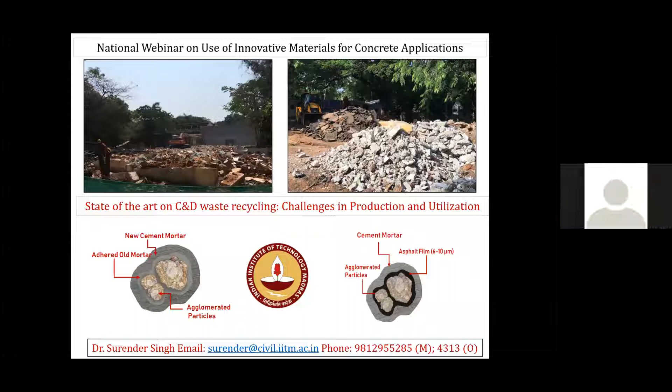So me and my team will be discussing today, or precisely speaking, sharing the experience on various aspects of C&D waste. I'll be taking up the work on the parameters and the challenges that we are facing in production and utilization of C&D waste. So the big picture is that we have to think about what will happen in the next 10 years.

Obviously, as you all must be knowing, India will be the fastest growing construction market in the next 10 years.

By 2030, India will be the third largest construction market, and urbanization will be reaching 40%. Right now it's 30%, and in the next 10 years it will reach 40%. Obviously, it is expected that India will bypass China in becoming the most populated country. So for accommodating all these persons, we need more houses. Around 170 million additional houses are yet to be constructed by 2030, and more than 5 lakh kilometers of multi-lane highways will be constructed in the next 10 years.

So for all these things, additional houses or multi-lane expressways or highways, what will be needed? Obviously, we'll be needing the money to construct the houses and connect the different parts of the country, right? In addition, we'll be needing the resources.

So up to now, what we are doing is demolishing the mountains to acquire coarse aggregates, stopping the rivers to acquire fine aggregates, or we can say river sand or natural sand. And for furniture, we get it from wood. But this is a past scenario. Obviously, we are doing this in the present domain also.

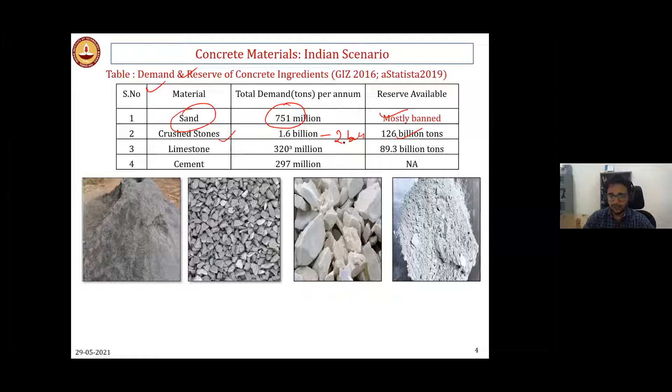Limestone: 320 million is required per annum, and 89.3 billion tons is available.

But we should remember that most of these reserves right now are in reserved areas where we cannot do the mining activities, we cannot demolish it, right? For example, national forest, reserve forest, reserve parks where we cannot do the extraction.

So that means if we keep the current demand and consumption of materials constant, in the next 40 to 80 years we'll be having no resources for our consumption. So that means it is the right time to explore other alternatives for civil engineering applications, right?

So usually there could be three questions in your mind. The first question will be, can we use C&D waste for concrete applications? Everyone now is thinking how to use the C&D waste. If yes...

...what fraction we can use. C&D waste can have different fractions: coarse aggregate, fine aggregates, and powder also. When you crush the C&D waste, some powder will be generated. Can we use the powder? So this is the current demand, right?

And if we are able to use it, how much proportion can we use? And then, is it really a worried situation in India? How much C&D waste is available in India? We should know it, right?

So I hope with today's presentation, we might be able to address all three questions, right?

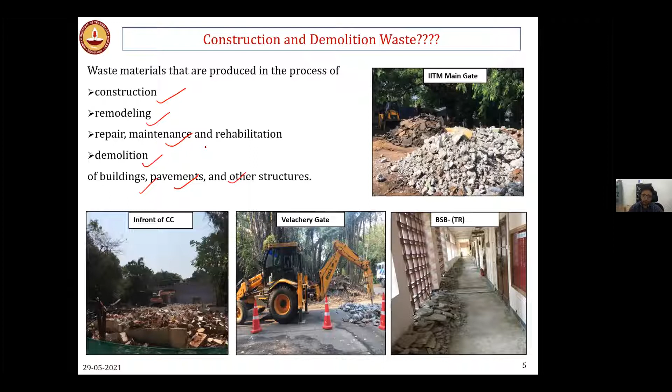So recently, some renovation work is going on inside the IIT Madras campus, and we took photos from there. The main purpose to show these pictures is that you might have seen that near your areas, many activities are being done, and those activities will be generating the C&D waste, right? So normally the normal practice is to dump the C&D waste in nearby areas.

But yeah, what we argue is not to dump it. We can recycle it. So if you take some C&D waste, let's say a building is being demolished, or a pavement is being repaired or demolished, out of all the materials, around 23% of that waste will comprise concrete waste, meaning only the building waste. And then it could have soil component in it, tiles, glass, or other things like brick bats, and it can have asphalt if you are removing the asphalt pavement. So in a broader sense, what we mean to say is that from this study, we found around 20 to 30% of the total C&D waste comprises concrete waste.

Okay, so there is a confusion. Some people call it recycle aggregate, some call it recycle concrete aggregate. The major difference between the two is the material. If we call it recycle aggregate, it will not only have concrete portion, but it will be a mixture - not just concrete, but also bricks, stones, tiles, and mortar of a specific size.

Here in the picture you can see the C&D waste. It needs to be taken out, crushed into different sizes, and that mixture of material is known as recycle aggregate - we can call it processed C&D waste because we did the resizing. If we talk about recycled concrete aggregate, it's the same thing, but here I'll be taking away only the concrete portion and then resizing it into different fractions. In that scenario, we call it RCA, or recycled concrete aggregate.

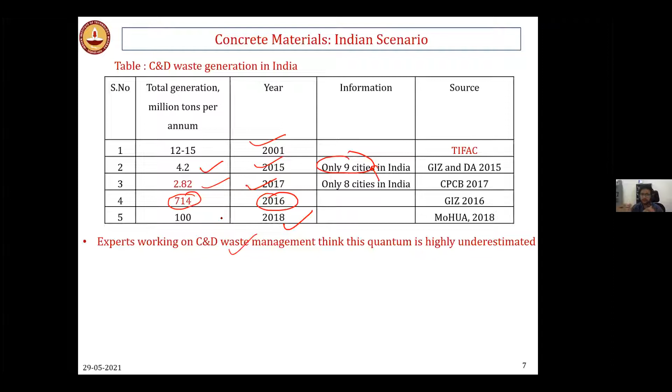If we compare ourselves with foreign lands, considering 530 million tons of C&D waste generation, we stand at the second position after China, with the US third in C&D production per annum. But we know most of the C&D waste is being dumped here and there - if we account for that and consider we're producing more than 1,000 million tons per annum, we could be at number one.

So it's not a good thing, right? But on the other hand, it's a good thing if you're able to utilize it. But we have to see how much of the C&D waste generated in India is actually being utilized. There are many government studies taking place on this.

Earlier it was said we are utilizing or recycling only 2% of the C&D waste, but a recent study has shown we are able to recycle only 1% of the entire C&D waste quantum in India. If I talk about Japan and European countries, where the quantum of C&D waste is lesser compared to India, they are doing 90% recycling.

So what are the reasons we are not able to use the C&D waste? You might have seen many ads and research publications where they are extensively using C&D waste, but why is it not happening in the field? What are the main reasons? We did some surveys and found these main reasons - like somebody says the cost of the C&D waste will be high.

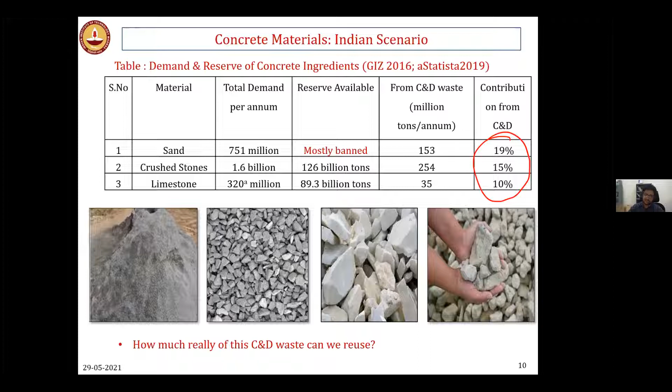Nowadays, if you see most of the plants, they are selling paver blocks or interlocking blocks for footpaths, cycle tracks, sidewalks, and different applications. So mostly in India, we are producing paver blocks made with recycled aggregate, or maybe partition walls - they are using it for that.

But the concern is that the quantum of C&D waste that could be recycled here will be very, very less. We have to think beyond it. We have to see whether we can use the C&D waste for structural applications or not.

But considering the quantum of C&D waste and the crushers available, there is a huge mismatch. So the ministry came with a proposal that whichever city has more than 1 million population, they should have at least one recycling plant.

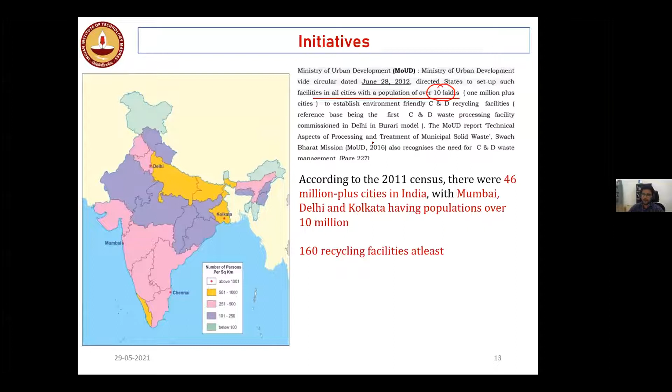So we did the analysis. What we found is that, considering this ordinance, at least 160 recycling facilities should be available in India - minimum 160 recycling facilities, and currently we only have 13 facilities. That means in the near future, many more recycling facilities will be coming, and we could see the use of more C&D waste.

So as far as specifications are concerned, we have recently seen that BIS created the specification and guidelines for aggregates to be used for concrete applications.

The code says we can use recycled concrete aggregate up to 25% if going with plain concrete. If you intend to use recycled aggregate for reinforced concrete, you can use up to 20%. But because it's reinforced concrete, there could be durability or corrosion related issues.

So they restrict it to application up to M25 grade concrete. But if the grade is less than M15, for example ground floor, footpaths, or base course of pavement, we can replace up to 100%, whether coarse aggregate or fine aggregate. So now you can easily use it because the code is already specifying it.

For pavement application, for embankment, we can recycle up to 100%. For subgrade, we can use recycled aggregates up to 100%. For granular subbase, used for the separation membrane or drainage layer, we can use the concrete chunks, that is recycled concrete aggregate, up to 100%.

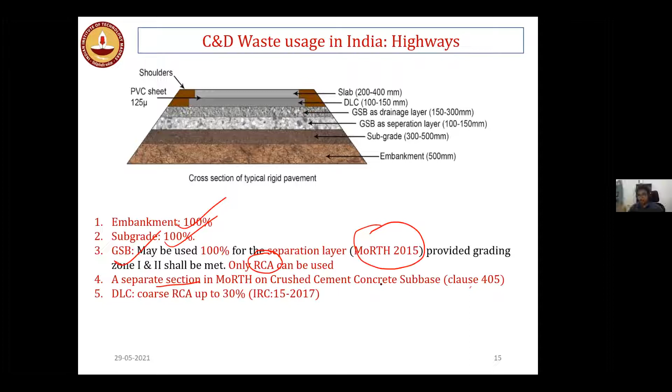For highway application, we follow the MoRTH specification, and the recent one has a separate section, clause 405, on how to use crushed cement concrete for subbase application. For dry lean concrete, used as subbase course or upper base course for pavement application, we can recycle up to 30%.

And sadly, we are not doing so. That is the reason we are only recycling 1% of C&D waste. If I compare with other countries, in most countries for structural applications, the specification allows use of C&D waste in plain concrete up to a proportion of 25% to 30%.

So what is the reason we are not able to recycle? The main reason is the adhered mortar content. You can see the natural aggregate will be like that, but in case of recycled concrete aggregate, it will be having the natural aggregate, definitely, but it will also be having adhered mortar content.

You can see some two aggregates sticking with each other. We call them agglomerated particles. This is the main reason, the adhered mortar content, mortar from the previous building. Because of this mortar content, what is happening?

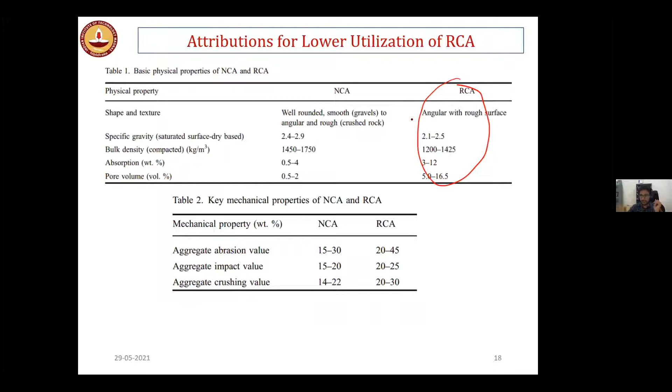The physical properties of the recycled aggregate are way lesser than the properties of the natural aggregate. The quality of the recycled aggregate, if I talk about the coarser fraction, is way lesser than the natural aggregates we normally use for structural activities. And why are the physical properties lesser? Because of the presence of the adhered mortar.

And if you use this recycled aggregate in concrete, there could be a 30% strength reduction. So for structural application, if you want to use M40 grade concrete, and you are using recycled aggregate, it could reduce the strength by around 30%. It's a significant reduction, and you don't want to take the risk.

That's why the code allows you, no need to replace the aggregates fully, but you can go for a proportion of, let's say, 25% or 20%, and it could save a lot of natural aggregates. But why is this happening? Because of the adhered mortar. That means it is time to improve the properties of the recycled concrete aggregate. If you're able to improve the physical properties, we can increase the proportion of aggregates for structural applications.

So there are various means on how to do it. Rohit will be taking part on how to address this adhered mortar. But what I suggest is that at the source only, we can reduce the adhered mortar content.

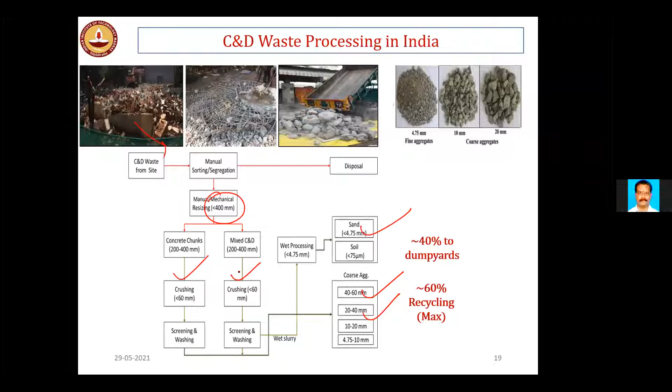So normally in India, what is happening is the C&D waste goes to the plant where they resize it, using a crusher to crush the aggregate into different sizes: coarse aggregate 60mm, coarse aggregate 40mm, sand particles. Some plants use dry crushing, some use wet crushing in order to reduce the powder content, since some powder emits during the crushing operation. Normally only one crusher is used at the site, the jaw crusher, and we have seen some plants use the cone crusher.

As a primary crusher, only one crusher they'll be using. But what we suggest is why don't we use different crushers? Maybe we can use the jaw crusher as the primary crusher, and we can use the cone crusher as the secondary crusher.

I have talked to many crusher plants. They are saying we are using two stages of recycling, and in both stages we are using jaw crusher. But can we go for tertiary crushing? That means three crushers: jaw crusher followed by cone crusher, followed by impact crusher.

Because our studies on natural aggregates show that if you go for two-stage or three-stage crushing, the physical properties of the aggregate will be better. It will have higher cubical shape and better interlocking capacity. That means it is time we should come forward and optimize this crushing cycle.

So if any one of you want to do your research work, obviously you can do it.

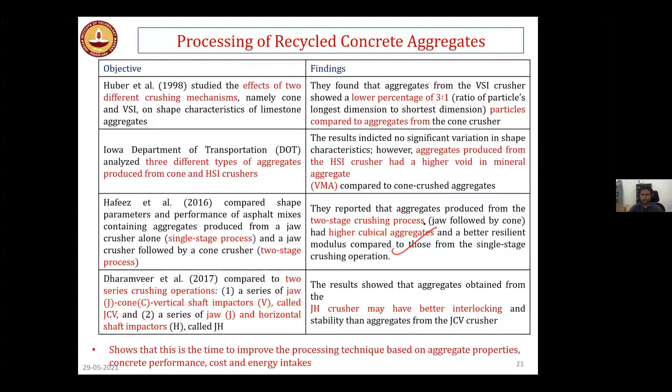There could be many methods available in the literature, and we are also following many methods. But mostly we have found that if we are able to remove this mortar, then definitely we can get the natural aggregates out of the C&D waste. So Rohit will be throwing light on the various mechanisms through which the aggregates can be extracted from the C&D waste.

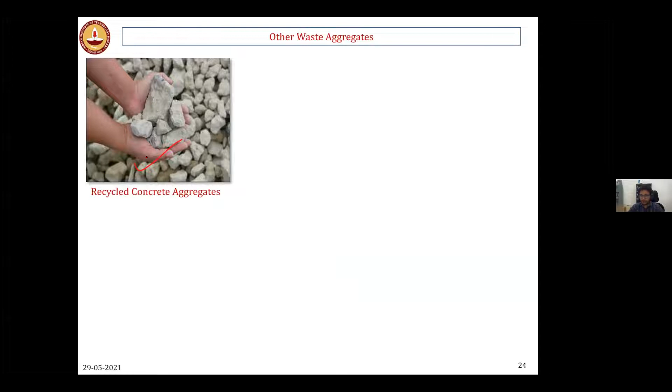So can we explore other alternatives for aggregates for concrete production? Definitely we have the reclaimed asphalt pavement - that waste we get from demolition of flexible or bituminous pavement. And then can we use industrial aggregates such as iron slag? Definitely we can use it. In fact, IS 383 allows use of industrial waste like copper slag or steel slag.

And nowadays fly ash aggregates as lightweight aggregates are also being used. Now research is going on whether we can use plastic aggregates or rubberized aggregate to enhance the toughness properties of concrete. So there could be different alternatives, but as an engineer we should know the chemistry and physics behind these aggregates. We know the chemistry behind concrete aggregates and RAP aggregates, but before making any decisions, we should explore the potential of different aggregates.

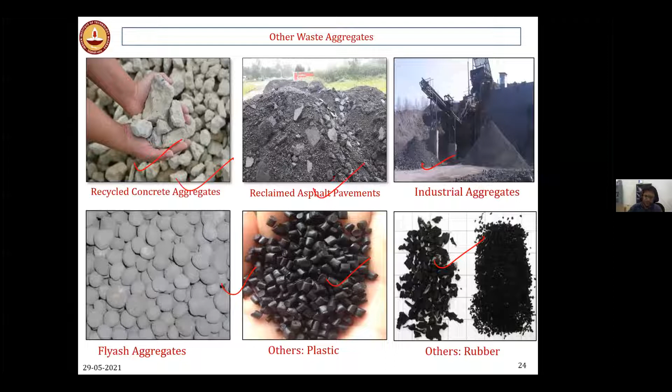So I'll be skipping these slides. Recently what happened - we came up with a center of excellence. It is the first ever center of excellence dedicated for recycling. IIT Madras - the ministry has sponsored IIT Madras to start this center. Actually, we are calling it a prospective center of excellence.

So what we'll be doing here - whatever the waste, whether it's concrete waste, recycled aggregate, RAP waste, or industrial waste, we'll be studying them and we'll be providing the solution.

So the solution will not be based upon the material level alone; we will also be doing research on how to reduce the generation of waste during construction and how to manage all these activities. If you want to get more knowledge on the first ever Center of Excellence, you can visit the site. You can see 11 different faculties who are working with waste and how to manage it have clubbed together and started this Center of Excellence.

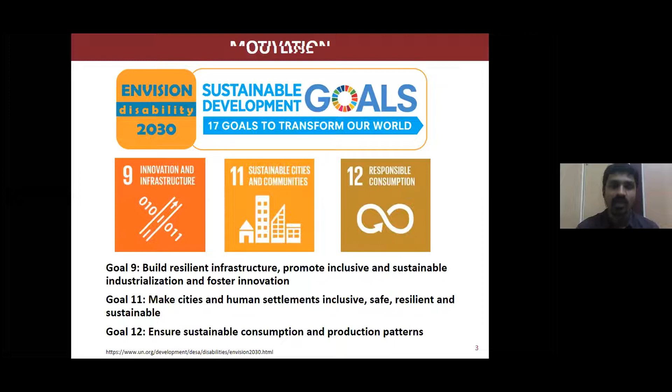About motivation: as you might know, the United Nations have come up with 17 Sustainable Development Goals. This talk will address 3 of those 17 SDGs: SDG 9, building resilient infrastructure and fostering innovation; SDG 11, building sustainable cities and communities; and SDG 12, responsible consumption and production patterns.

Coming on to the Chennai case study: what is happening with demolition waste in Chennai? If we understand that, then we'll know the need for talking about various strategies and policies. I'm categorizing the waste handling practices into 3 different phases: pre-demolition, demolition, and post-demolition phase.

In the pre-demolition phase, if you are the owner of a building and want to demolish it, you go to the corporation or local body and apply for a permit with all required supporting documents. To authenticate those documents and information, the local body sends an AE to inspect the site, and once the information is validated, your permit is sanctioned, and you can go ahead and demolish your building.

However, while it is good practice to have this system which extensively validates all the information, what we're missing here is we are not focusing on the kind of waste that will be generated or how the waste will be managed in the process. The only thing validated is preliminary details like whether the applicant is the real owner or not, with no focus on waste management.

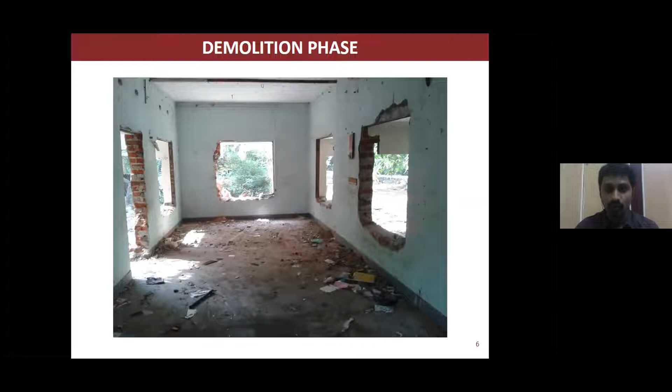In the demolition phase, as you can see in the slide, all the wirings, doors, windows, and every other material that has economic value is salvaged, and only the structure remains. Almost 90 to 92% of demolitions happen this way.

So what happens to salvaged materials? They are carefully chipped, salvaged, and stored, and they re-enter our supply chain as they have a very strong informal network. We should take care that if we are designing any strategies and policies, we should not disturb this informal and very strong network.

Then we actually use hydraulic breakers or pneumatic hammers to take down the building, and even the reinforcement steel embedded in the concrete chunks is salvaged using gas cutters and sold. A major chunk of all the steel we use is predominantly recycled steel, which goes to the yard, gets melted, and comes back in some chain.

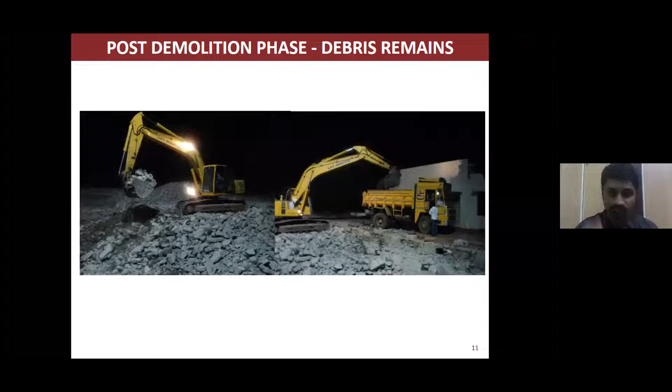So in the post-demolition phase, only debris remains, a mixture of concrete, brick masonry, tiles, and other ceramic products. What happens is they are usually shipped off at night from the site and disposed of in all places - lakes, road banks, sidewalks, and everywhere else you can see. And of course, the land mafia also has control over it. It's not a new phenomenon; it has been happening for a long time, and you would have noticed it on every road and sidewalk.

Why does this happen? As Dr. Surender mentioned, our recycling capacity is very low. For example, the total installed recycling capacity in India is only about 2.5% of the total waste generation. On top of that, we don't even know how much waste we're generating, because of huge variation and underestimation in waste generation data. To understand the magnitude of this deficit: Netherlands, with a population of 1.7 crores, has 120 recycling plants, while India, with over a billion population, has only about 10 to 20 recycling plants. That's the scale of the deficit we're talking about.

So what's problematic? We have unreliable estimates compared to the extensive surveillance happening in other countries. We do not focus on waste, whereas other countries have mandatory preparation of waste management plans, crucial infrastructure, and networks of facilities. We do heavy demolition, while many other countries do selective demolition where they properly dismantle the structure. We have a mixed waste stream in terms of debris, while other countries do on-site sorting. And we have very inappropriate policies and structures compared to effective policies and adequate enforcement elsewhere.

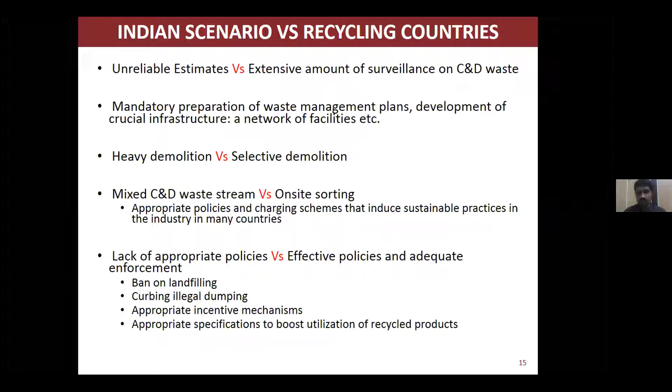So to counter this, in order to nurture a recycling ecosystem, what we need is effective policies. Based on content analysis of over 300 journals and secondary reports, we have decoded strategies and classified them into 10 different policy buckets: taxes, incentives, voluntary agreements, disposal regulations, research and development, mono landfill, demonstration projects, training schemes, waste exchange platforms, and waste management plans. We shall look at each one of them in more detail.

Disposal regulations, as the name indicates, are disposal restrictions, and these are very common. For example, in the Netherlands, there is a complete ban on disposing debris that can be reused or recycled. In Hong Kong, there is permission based on sorted nature - for example, if you have a mixed waste stream with more than 50% inert waste, that is concrete, debris, and bricks, you are not allowed to enter the landfill; you cannot dispose of it there.

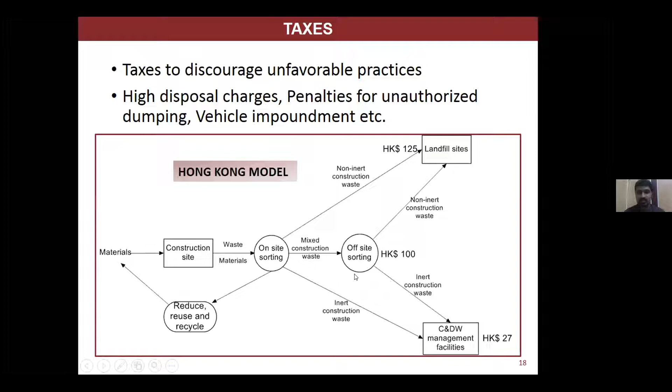The Hong Kong model is very effective. For example, from the construction site, if you take material to a landfill site, you are charged 125 Hong Kong dollars per ton, and there is a restriction that you cannot bring in inert construction waste there. So what will happen is you will have to do on-site sorting, and once you do that, the inert waste is accepted at a separate waste management facility where you are only charged $27. If you cannot do on-site sorting, you can take it for off-site sorting and pay $100 to get it sorted, then take the non-inert fraction to landfills and inert fractions to waste management facilities. These systems need to be put in place to facilitate recycling.

The third important thing is... sorry, there's a disturbance. Your voice is not enough. I think I have some comments. They can't hear you properly. I'll probably raise my voice.

So the third important structure is incentives. It's a carrot mechanism to provide benefits for environmentally friendly practices. For example, in Hong Kong, adoption of recycled materials leads to exemptions in FSI calculations, so you get an incentive to use recycled products. In the USA, there's a recycling grant that helps you set up recycling facilities. And in King County, it's not just money, but there's also a recognition program where they give construction workers an award for each site that does waste management properly. So there are various kinds of incentives that you can plan.

One of the other things we've noticed is that this is not just on the regional level but on a site level as well. Incentives have to be put in place there too. For example, there is a study that says incentives must be shared with all stakeholders at all levels. The labor doing on-site sorting at the lowest level should also gain some benefits from the waste management activity. Therefore, there must be incentive sharing across levels in the waste management system, and people in charge of developing such systems should think about incentive sharing as one of the key measures for better recycling or waste management activities.

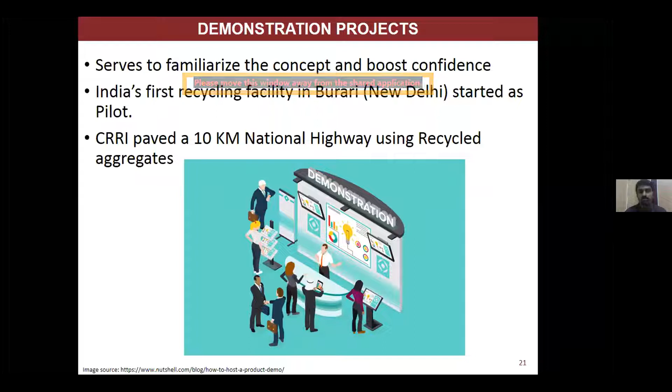The next one is demonstration projects. These are very common and serve to familiarize the concept and boost confidence. For example, India's first recycling facility in Burari was set up as a pilot plant in 2009, and it has since been upgraded in capacity and is running very well. Even the Central Road Research Institute has paved a 10-kilometer national highway using recycled aggregates to build confidence among stakeholders in using recycled aggregates safely. Such demonstration projects are needed in India as well, and more such projects should be done.

Of course, the next one is training schemes. Training imparts necessary skill and knowledge to perform construction waste management. It's been noted that almost 33% of on-site waste could be avoided through careful design decisions. However, lack of awareness also plays a role. For example, in a TIFAC survey, they noticed that almost 30% are unaware of recycling possibilities of construction waste streams, and almost 70% are unaware of recycling techniques at all. So that's the kind of inadequate knowledge we have about waste management, sorting, and various other activities.

So training schemes need to be put in place. Then, of course, research and development is a no-brainer to push the boundaries of the system. Only R&D enables development of recycling technologies, identification of waste, and performance evaluation. The previous speaker also talked about development of standards and regulation, so for R&D I need not mention much—that's one of the major indicators to nurture the system.

Voluntary agreements—it's pretty new. Voluntary agreements can drive responsible behaviors by bringing various stakeholders together. This is effective in situations where very complex management issues might pop up.

For example, in selective demolition, on-site sorting, utilizing recycled products, handling packaging waste. Let's say if somebody puts up a recycling plant, he won't know how much demand or how many people will actually buy recycling products. So once enough people come together and sign an agreement or pact saying 'I will procure this much quantity over this specific period of time,' the recycler will have good confidence in terms of visibility in demand, and thereby better planning can be done.

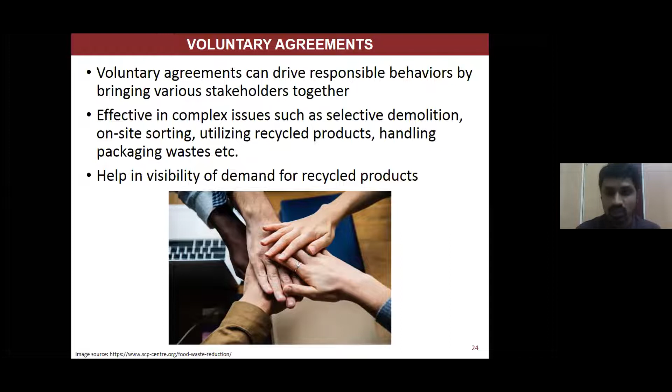The next is waste exchange platforms. Of course, it's born out of the internet. It helps solve the information mismanagement problem by matching supply and demand. As we all know, land space is a scarce resource in construction projects. Therefore, construction personnel would want to get rid of waste as early as possible after it's generated. These platforms give visibility and therefore enhance the chances of beneficial use of such waste.

Of course, the CPCB also has a waste exchange portal that deals with hazardous and non-hazardous waste, and various other waste exchange portals are coming up—it's been recently new here. However, it's very old in various other countries.

Lastly, we're talking about waste management plans. Of course, any activity has to be planned properly before we start it. So we need to have a proper target, we need to put appropriate processes in place, and of course it's a must that responsibility be clear-cut and mentioned clearly. And there must be incentive sharing even in the waste management plan, and thus it can actually succeed.

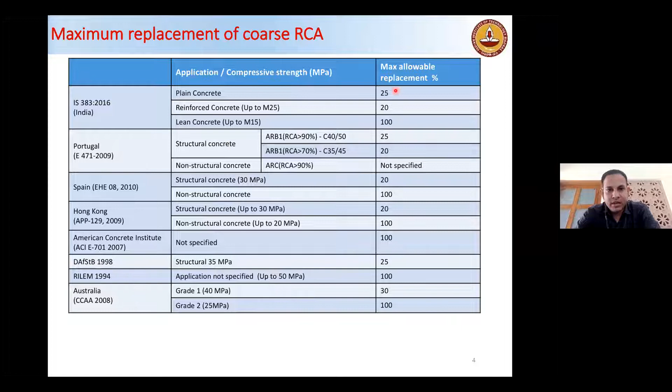You have already seen this. There are many standards, but 100% replacement is allowed only for lean concrete, and 20 to 25% is allowed only in plain and reinforced concrete applications, limited to sub-base, paver blocks, or non-structural applications. You have also seen these failure modes. Out of these, there are two common failure modes: failure of the adhered mortar, and failure at the ITZ between the old adhered mortar and the original aggregate.

To overcome these two cases, there are beneficiation techniques: removal of attached mortar, where we try to remove the attached mortar from the surface of the aggregate, and surface modification. I'll be talking about these two beneficiation techniques, and also a comparison between these different techniques.

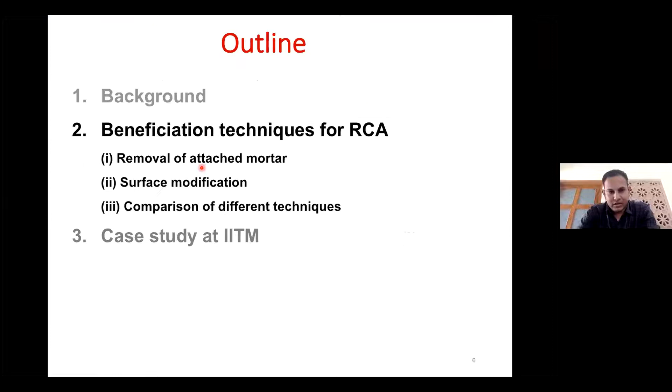Mainly you can divide these processing or treatment techniques into two parts: removal of attached mortar, and surface modification. Removal of attached mortar could be done by mechanical scrubbing, acid soaking, combined action of thermal and mechanical action, microwave heating, and other methods like ultrasonic cleaning. Surface modification could be done by coating with pozzolanic materials and impregnation of nanosilica or nanolime. There are other methods like polymeric treatment, where you coat the aggregate surface with PVA and other chemicals to increase the bond or reduce water absorption. There are also biodeposition of calcium carbonate and curing or carbonation conditioning.

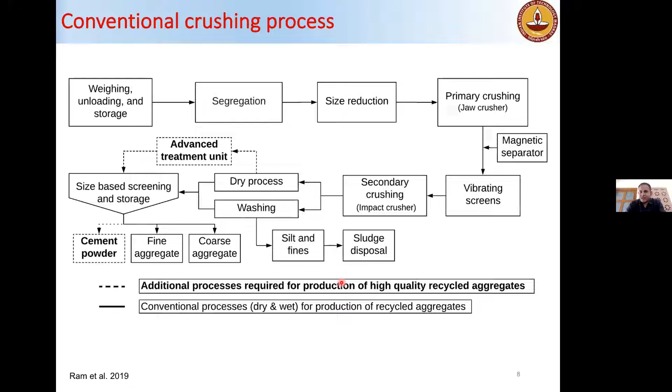Before we go through these processing or treatment techniques, let us go through the conventional crushing process. As Professor Surender and Ram mentioned, there is weighing, segregation, size reduction, and crushers used, maybe jaw crusher and impact crusher, and meanwhile you separate the rebars. There are two methods currently practiced in India: one is the wet washing method, where you remove the silt and fines, and one is the dry process. After this, there is size-based screening. Advanced treatment could be done after this process, or maybe after the primary crushing also.

Let us see what treatment techniques are available. First is mechanical rubbing, where you can use an eccentric shaft rotor, and the RCA passes between the outer and inner cylinder, rotates, and removes the attached mortar. Another one is similar to ball milling, where the mortar is removed by scrubbing against iron balls in separate parts of the drum. At laboratory scale, people have been doing this in small milling machines or abrasion machines as well.

Next is acid soaking. In this, RCA is soaked in acid for 24 hours, and then water is added to remove the acidic solvent or the corroded part of the aggregate. Granite or the other aggregate are more stable, whereas the mortar is prone to acid corrosion. So it is dissolved and removed, and then soaked in water, and what you get is the beneficiated recycled aggregate.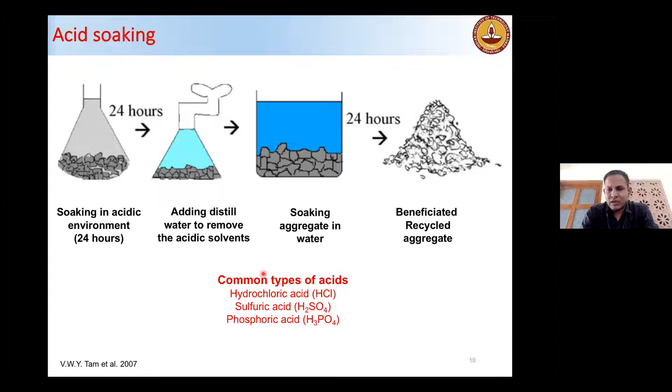Next is microwave heating, where heating is provided through microwaves, and this basically acts on the ITZs. You have a different dielectric constant of the mortar and the aggregate, so differential thermal stresses are developed at the interface of mortar and aggregates, and then it is delaminated, and you get clean aggregates.

There is a pilot scale plant in Singapore where they have used 10 kilowatt for 1 minute, and then after the microwave treatment, they suddenly put the aggregates into water for thermal shock, and then it is recycled. The other one is the combined action of thermal and mechanical process.

First the crushed aggregates are heated. The temperature could be from 300 to 500 degrees C, combined with a mechanical process. The heat will dehydrate the cement products, and additionally there is differential thermal expansion at the interface of aggregate and mortar. Further, a milling process is used to remove the loose attached mortar.

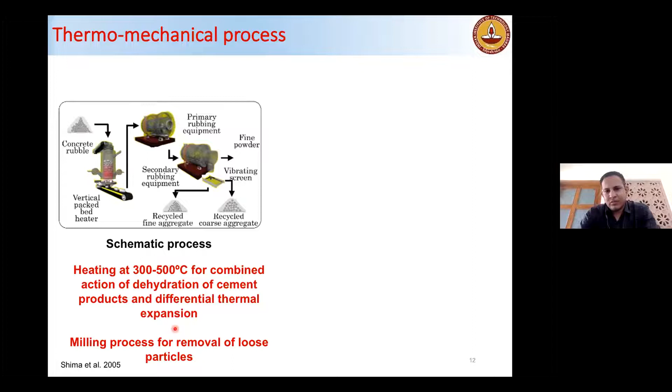There is a commercial portable plant in Japan where they've used 300 degrees C, and two stages of milling processes, different for coarse and fines, and they could produce very high quality recycled aggregates. The capacity of this plant is 5 tons per hour.

Coming on to the next type of treatment, where modification of surface is done using pozzolanic materials such as silica fume, fly ash, or cement. This is the process where first you try to coat the aggregate with the pozzolanic material, and after several stages of mixing and adding different constituents at different times, you get the concrete.

With this concrete, what happens is the ITZs are densified. Also, the attached mortar, which is porous and could have some cracks, is also filled with the pozzolanic materials.

Next is the biodeposition of calcium carbonate. Using bacteria, the pores and cracks of the recycled aggregate are filled. The bacteria attracts calcium ions and produces calcite or calcium carbonate, which also requires a culture medium, basically urea. In this process, the bacteria forms spherical depositions of calcium carbonate on the surface.

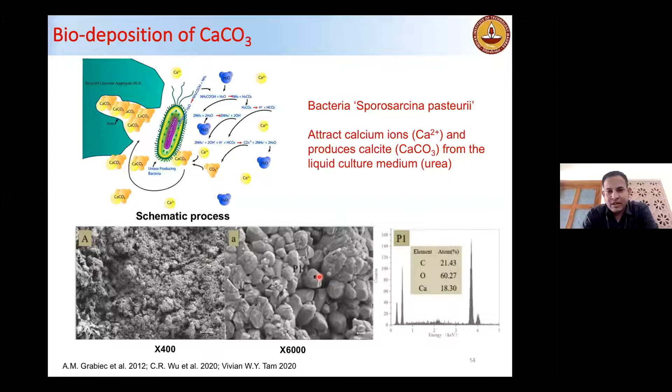This will densify and improve the aggregate properties.

A very hot topic these days is CO2 curing, or carbon conditioning, or carbonation of the recycled aggregates. There is a chamber with a vacuum pump, and CO2 is supplied from the CO2 tank. The chamber is pressurized with CO2, and there will be carbonation of the recycled aggregate, which is a kind of permanent sequestration of CO2.

This is one experimental setup, but now there are a lot of startups and companies coming with different products, such as concrete blocks made by CO2 curing, and there is now also a carbon cured cement, in which the fresh cement has CO2 injected.

Let me give you a comparison of the different processing methods based on the state of the art available today. There could be positive and negative remarks for each method.

Mechanical rubbing has high energy consumption and a multiple stage process. Acid soaking has high water consumption and problems of handling, and there could be contamination of sulfate and chloride, which could be a durability problem.

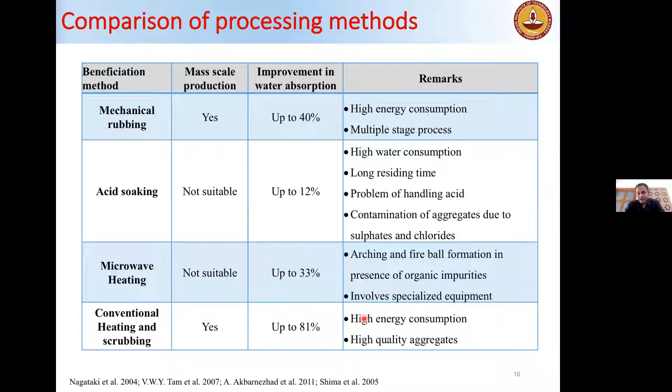Carbonation produces high quality aggregate and improves the ITZs. Then you have biodeposition, where you need a humid environment, and the bacteria could be killed at high temperatures.

So now coming up on the case study we have done at IITM. This is based on the thermomechanical treatment. I'll be discussing about the process, the properties of beneficiated aggregate, and the properties of the concrete which was made using this beneficiated RCA.

So in Chennai, there was this demolition site. We got the waste from it, and already the rebars were removed. And then we did the size reduction. We optimized this process also. We used different sizes of concrete pieces, and then we used an electric furnace to heat this.

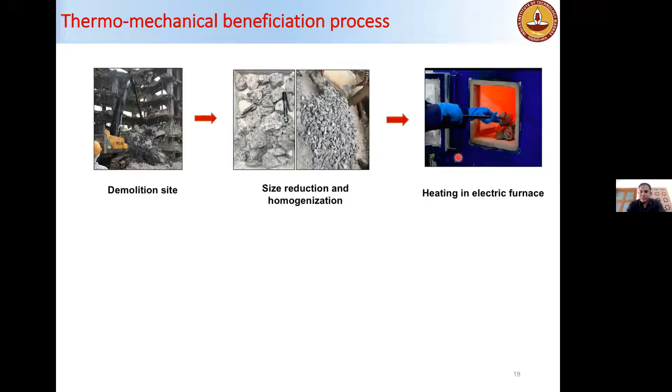Various temperatures were tried, starting from 350 degrees C to 500 degrees C. And then after the cooling and the mechanical milling, you got these three products: coarse aggregate, fine aggregate, and concrete fines. The coarse aggregates are sized from 20 mm to 4.75, and your fine aggregate is 4.75 mm to 300 microns. And this is the concrete fines, or the powder, which is less than 300 microns.

So you can see after the treatment, the aggregate looks like this. You can see that almost all the attached mortar is removed. Let me just show you the aggregate piece.

So the comparison of this beneficiated aggregate with granite aggregate, laboratory jaw crushed aggregate, or untreated aggregates. We also have got a sample from the industrially produced recycled aggregates from Bangalore. So you can see these are the three types of aggregates.

As far as the physical properties are concerned, we all know that water absorption is a good indication when you try to compare the different kinds of recycled aggregates. You can see that we were able to bring the water absorption down to close to 1%. Usually it could be 5 to 6%. And the mechanical properties are also as good as the granite aggregates.

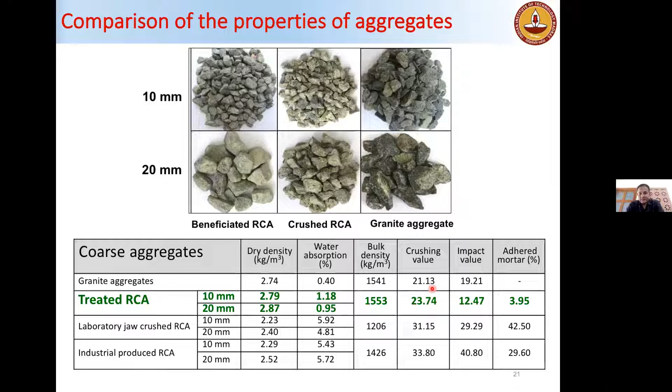We have also tried using this aggregate in the concrete. Let me just give you a glimpse. We have replaced granite aggregate with the coarse recycled aggregate at 0%, 20%, all the way up to 100%. So the bottom line is, with the treatment process, you can actually optimize the use, and you can use up to 100% of the recycled aggregate after the treatment.

Before ending the presentation, I would like to acknowledge the financial grant from the UKRI DST project and the laboratory used in the MPCM lab established by the FIST grant, and the UK India Social Enterprise Education Network for the financial help, and lastly the Ministry of Human Resource Development, Government of India. Thank you.

The year was 1983. India had made history. It was the time when we as a nation started believing that anything is possible. Around the same time, we took our first step in the transformational journey of India. We laid down the foundation of Rajashree and Vikram Cement Works to help every Indian realize his dream of owning a home. It was with this purpose that we started our journey.

In 1988, the Birla White Cement plant was commissioned. In 1998, we built India's first RMC plant to transform the country's landscape at speed. Our common mission brought our cement businesses together in 1998. With the acquisition of L&T Cement, we created our new identity in 2004. In 2010, we acquired Star Cement. To keep pace with the demands of a rapidly growing nation, we expanded our capacity organically and inorganically.

Along this journey, we laid down the tracks of progress and built the gateways to a new India. We connected villages to cities and made urban commute faster and safer. From naval bases to world-class ports, and from water reservoirs to stadiums, together we've made it all happen. We've built one of the largest logistics networks in the country and have invested in skill development of masons across India, including women masons. UltraTech's initiative, India Next, was launched 4 years ago to engage with the brightest minds in the engineering and architecture community to build a more meaningful future for India.

in 2019. We continue to anticipate our customers' changing needs and provide innovative products and solutions, because we believe that whether you are building your home or an iconic infrastructure, it is not just a structure, but your badge of reputation, and hence you would want only the best. India's number one cement, UltraTech, is always with you on the path of progress.

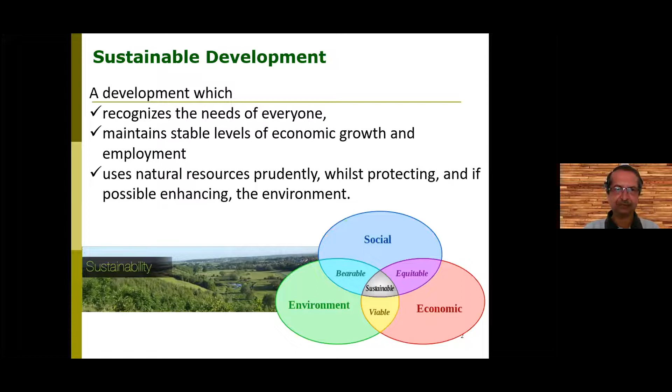Now coming straight to concrete, because there is hardly any time left, half an hour is what is given to me. Concrete has many green benefits, not the color green that is shown here. Concrete per se has a lot of green benefits, and it makes it a sustainable choice. Let's see how. We have to consider, as was mentioned earlier by other speakers, the entire life cycle.

That is, from the time extraction takes place, processing of the extracted material happens, the construction process, the operations involved in construction, and later, when the life is over, the demolition of these constructed facilities and possible recycling of the material. If you consider all of that, which is basically the life cycle process, concrete makes a significant contribution to the triple bottom line of environmental, social, and economic development, which means it is a sustainable development. No other material can give you this kind of benefit so holistically.

For example, if you take the production of concrete, which consists of about 10 to 15% cement, it results in the emission of about 0.13 ton of carbon dioxide per ton of concrete. Because if you look at 1 ton of cement, right now they say if it is OPC, it is about 763 kgs of equivalent carbon dioxide. So in concrete, we are using only 10 to 15%, so per ton of concrete we have around 76 kgs or 114 kgs of carbon dioxide emission.

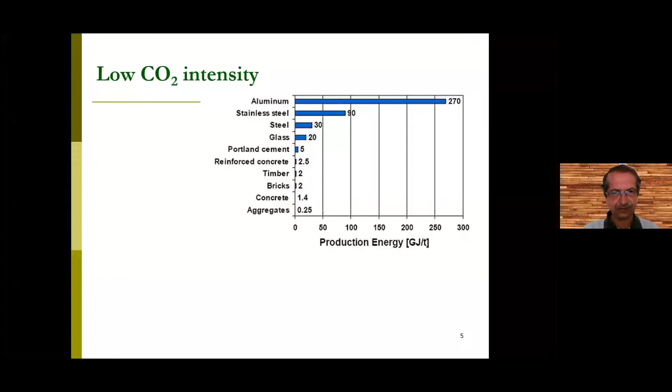Now, if you look at all other construction materials, for example from aluminum to stainless steel or reinforced steel and so on and so forth, we see that concrete is only 1.4 gigajoules per ton in production energy, compared to 270 gigajoules per ton of aluminum. Of course, we don't use as many tons of aluminum as we use for concrete. However, I'm just trying to give you a feeling that concrete is not as harmful a material as it is made out to be. There is no other material which is much better than this. Aggregates, of course, is 0.25 — I have brought this in because we're going to talk about aggregates.

Concrete manufacturing results in less carbon dioxide per unit than almost all other construction materials, so it is the construction material of choice at this point of time. Now, though we know that concrete is sustainable, we want to make it as sustainable as possible, or more sustainable. So there are several ways of doing it.

One way is making the cement itself more sustainable. How do we do that? We use less energy intensive kilns. We use supplementary cementitious materials so that the OPC component is reduced, or we use new types of clinker which emit lesser carbon dioxide, use alternative fuels and renewable energy during the production process, and if possible, produce a clinker-free cement itself.

So these are the initiatives that people are thinking about for making concrete sustainable through the cement route. Now, if you look at alternative materials in concrete, we generally talk of alternative cementitious material, and we also talk of alternative aggregates than what we are right now accustomed to using.

People are also talking of sequestering carbon dioxide in concrete, which was mentioned by the previous speakers. We are planning to produce clinker-free concrete, that means without any cement in it - for example, geopolymer concrete. So efforts are on to make sure that we reduce the impact of construction activities on sustainability. We are talking of what are known as wastes in concrete being converted to assets - converting liabilities into assets is what people are now talking about.

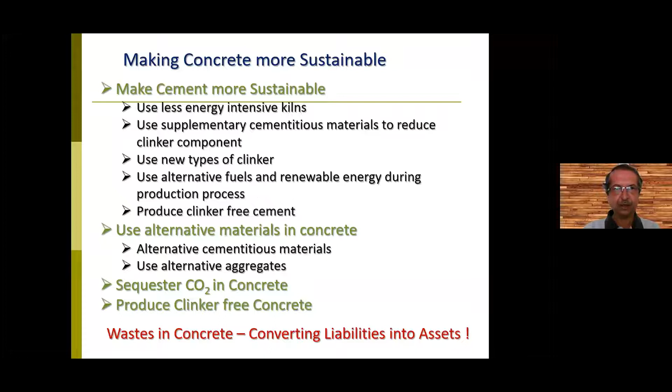Now, with a whole gamut of things here which is not possible to cover right now, we are going to talk of only use of alternative aggregates, because that is the topic that has been chosen for this presentation.

Now, when we look at aggregate in concrete and mortar, quickly we can see that in mineral terms, aggregates are the pieces of crushed stone and gravel used in making concrete, or it is also used as a bulk fill material in the construction industry. Aggregates are very important because nearly 75% of volume of concrete is made by aggregates, and they are arbitrarily classified as fine and coarse on the basis of size. Anything less than 4.75 mm is sand, and above that is considered coarse aggregate.

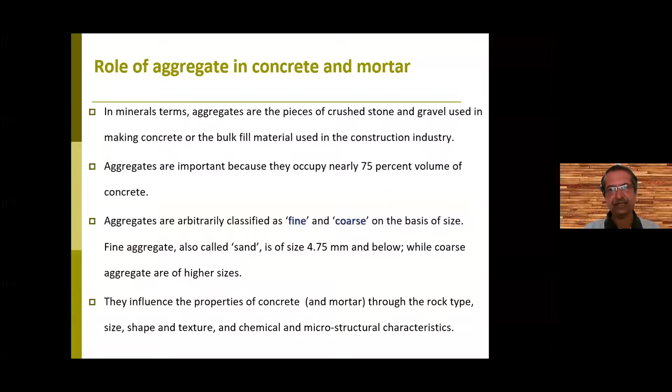So the aggregates influence the properties of concrete and mortar through the rock type, size, shape, texture, chemical and microstructural characteristics. Although it is supposed to be an inert material, there could be some impacts when we start thinking of alternative aggregates, as was again mentioned in the previous speaker's talk.

So in construction, what is the impact of this aggregate itself? If you look at it from the triple bottom line of sustainability, the extraction of aggregates and processing of aggregates and bringing it to the construction site and using it - they have several impacts. Environmental impacts could be release of emissions and generation of wastes at various stages. Social impacts could be truck traffic, transportation, potential nuisance to neighbors, dust emission, and so on. Economic impact could also be consumption of water and energy for the extraction and processing of the aggregates, and also transportation.

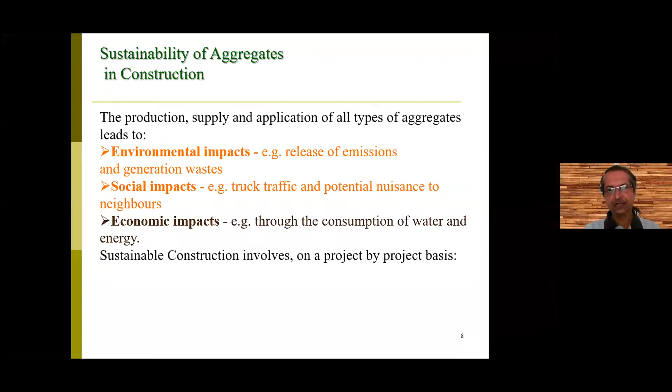So in sustainable construction, it is required to explore on a project by project basis. The assessment should be done of the potential environmental, social, and financial impacts arising from the use of aggregates. We don't seem to be doing it right now - we only talk of cost, we only talk of strength. We never talk of the potential impact of whatever we are doing.

Now, the seeking of a triple optimal, triple bottom line solution from sourcing to application is what we are going to talk about, or keep in mind, while discussing the future things.

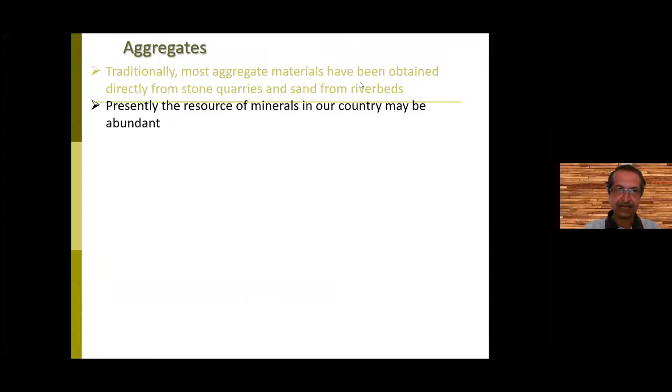So traditionally, most aggregate materials have been obtained directly from stone quarries and from riverbeds. The sand is from riverbeds, and the resource of materials appears to be very, very abundant, as was shown in the earlier slides also. Now, we must realize that they are a finite resource - it's not infinitely available. Also, as was very rightly brought out by Professor Surendra, most of these aggregates are right now in inaccessible or unquarryable areas like forests and so on. Similarly, river sand we are not able to exploit because of the damage that is getting created in the riverbeds.

So our continued use will obviously lead to their depletion. If not in 40 years, it may be in 80 years or 100 years, but human generation wants to live for much more. So we have to think of how we can limit the utilization of virgin materials. The global consumption of construction aggregates right now is expected to reach around 63 billion metric tons by the end of 2024, whereas it was 43 billion tons in 2016 - so already 1.5 times it's likely to go up.

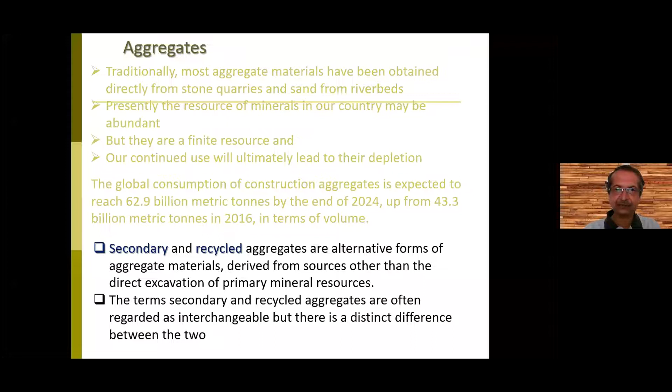So we will talk right now not of primary aggregates, but of secondary and recycled aggregates. The recycled aggregate component has been excellently presented by the team from IIT Madras. These are alternative forms of aggregate other than direct excavation of primary mineral sources. The terms secondary and recycled aggregates are often regarded as interchangeable, but actually there is a distinct difference between the two.

Recycled aggregates are produced from materials sourced from recycling of construction and demolition waste, which has already been dealt with, so I will not talk about this. Secondary aggregates are usually byproducts of other industrial processes which have not been previously used in construction. These could be from natural sources like slate aggregate, China clay sand, etc., or from manufacturing processes like slag, coal bottom ash, and so on.

So while looking at making concrete more sustainable from the point of view of sustainable aggregates, we have two alternatives: recycled aggregates and secondary aggregates. Also for sand, as alternatives to river sand, people are looking at crushed stone aggregates, manufactured sand, C&D waste sand, marine sand, industrial waste like pond ash, and so on.

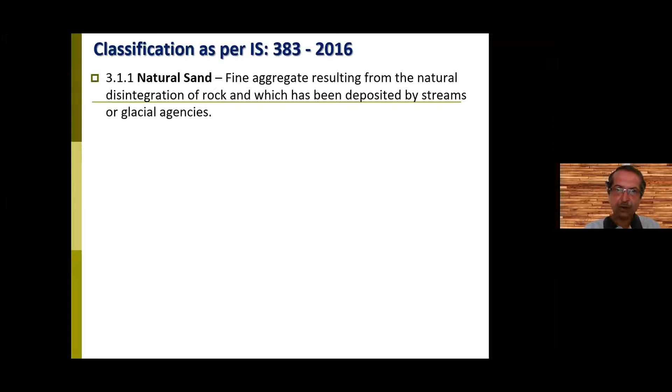So the primary source or guideline for coarse and fine aggregates for concrete is IS 383:2016, based on which we must judiciously utilize all the alternatives we are considering. The code makes a distinction between aggregates in the form of natural sand—fine aggregate resulting from natural disintegration of rock over millions of years, deposited by streams or glacial agencies—and crushed stone sand, which is fine aggregate produced by crushing hard stone.

The word manufactured sand is very commonly used for crushed stone, but after the 2016 code, we are not supposed to use manufactured sand for crushed stone aggregates. So fine aggregate produced by crushing hard stone is called crushed stone sand by the Indian Standard Code.

There is also what is called crushed gravel sand—if you crush natural gravel, it is called crushed gravel sand. You could mix both, and it is called mixed sand. And there is manufactured fine aggregate as per IS 383, which is fine aggregate manufactured from sources other than natural, since quarried granite or basalt is natural material. Here, fine aggregate manufactured from other than natural resources by processing materials through thermal or other processes like separation, washing, crushing, scrubbing, etc. are designated as manufactured fine aggregate or manufactured sand.

So manufactured fine aggregate can be recycled concrete aggregate also.

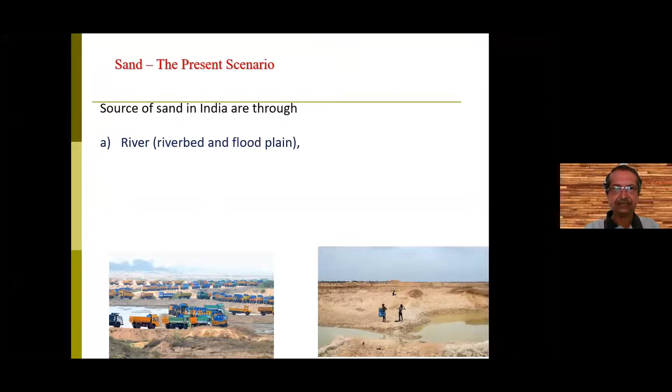Now, if you look at the Indian scenario as far as sand is concerned, the sourcing of sand in India is through rivers, riverbeds or floodplains, lakes and reservoirs, agricultural fields, coastal marine sand, paleo channels, or manufactured sand and CSS, that is crushed stone sand. More than 90% in our country is extracted from riverbeds and banks, which we have been accustomed to utilizing for quite some time. The Government of India, Ministry of Environment, Forest and Climate Change, in January 2020, brought out enforcement and monitoring guidelines for sand mining.

That is where the control started being applied very rigidly. It was supplemented by another guideline called the Sustainable Sand Mining Management Guideline. This is the latest amendment the government has brought in, hence I am mentioning the 2020 guidelines. These guidelines for sand mining also stress protecting rivers and habitat species, including turtles, and call for sensitive areas to be declared as no mining zones, and for using the latest technology for surveillance of illegal mining and estimating reserves.

A United Nations report has also said that, led by China and India, the world is mining sand at unsustainable levels. So we have to be very, very careful and responsible. As all of you are aware, the deadly world of India's sand mining mafia exists all over the country. You have seen so many news items in various newspapers showing how the mafia is trying to control the illegal sand mining that is happening.

There is a tremendous demand for sand, and that's why the sand mafia exists. The only way to beat this mafia is to reduce the demand for natural sand, not just by enforcing rules, but by making available alternative sand which is cheaper and better than river sand. That's the only way to beat the mafia, according to my feeling.

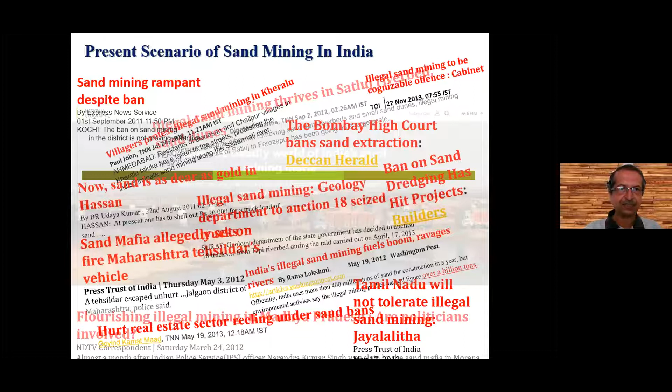These are newspaper cuttings you can see, right from Tamil Nadu to the Ganges area to Uttar Pradesh. Everywhere there has been sand mafia.

Now, considering the problems related to natural sand, switching over to crushed stone sand or M sand looks inevitable, because of environmental regulation, non-availability of natural sand, and quality and consistency issues. Though people feel river sand is very good quality, they don't realize that there are a lot of profiteering people mixing materials into so-called river sand, and hence consistency is a big victim there. That's what is happening.

Another reason alternatives are not being thought of is because of apprehensions related to construction practices where alternative materials like crushed stone sand, M sand, or recycled concrete aggregate or recycled waste material are to be used. So what we have to create now...

...is the opinion and understanding among people that CSS or M sand is different, but if it is engineered well, it can be better than river sand or natural resources. So not just concrete manufacturing, but concrete handling practices also need to be improved to make better concrete structures using crushed stone sand and M sand.

So what are the factors that define sand quality? It's the gradation, the particle shape, the cleanliness, and the texture.

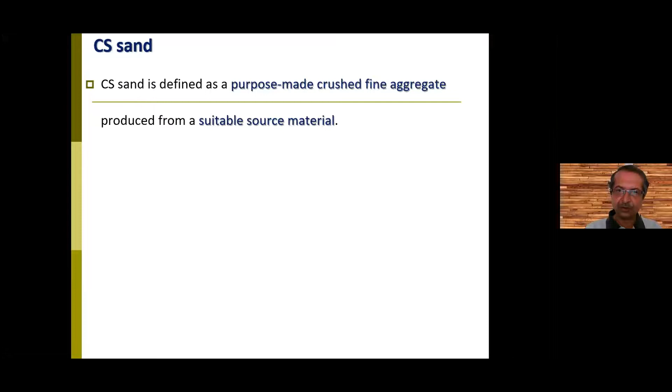That dust is actually a fine screening, and these are generally flaky materials, and they cannot be called manufactured sand or crushed stone sand.

Crushed sand is made in a very methodical manner using vibrating feeders, jaw crushers, cone crushers, vertical shaft impactors, vibrating screens, and so on, to make sand which is as good as or better than the river sand we are accustomed to using. They are available as fine artificial sand or coarse artificial sand.

And this is the most important one, the vertical shaft impact crusher, because this is the one which makes the sand the way it is meant to be made, similar to how sand got manufactured in nature. Nature hit one rock against the other, so it is stone hitting against stone or stone rubbing against stone, which turned larger stone particles or gravel into sand.

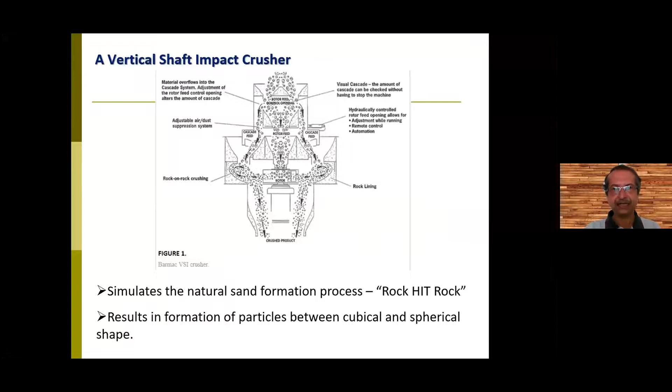So this vertical shaft impact crusher tries to simulate that natural formation process, and hence you will have particles between cubical and spherical shape, available for you to use as crushed stone sand.

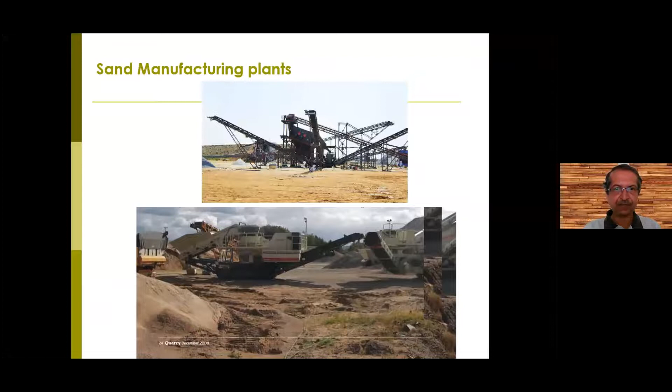Quick comparison between natural sand, crushed stone sand, and quarry dust: natural sand is a naturally occurring material, possibly carefully selected and sometimes processed, whereas crushed stone sand is a fine aggregate specifically designed and always processed properly. Quarry dust is unprocessed, and you cannot be sure of its quality. Similarly, natural sand is well shaped and graded most of the times.

In crushed stone sand, it is always well shaped and graded. And quarry dust can be very gritty and flaky.

You must be careful about some unscrupulous manufacturers who might be adding quarry dust to the crushed stone sand. Then there will be issues in quality, and certain properties or control on properties might not be there if you are using river sand or quarry dust. But generally in crushed stone sand, the manufacturer has to be evaluated to check what kind of facilities he has. So how to identify crushed stone sand?

Basically, if you hold it in your hand and rub it, you can find out whether there is quarry dust because it will stick to your hand and you can visually make it out.

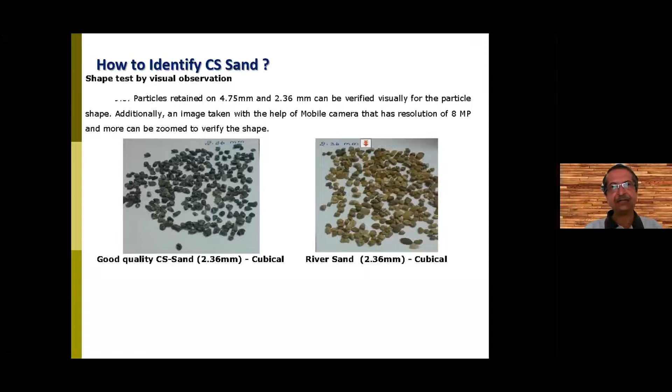For your benefit, a photograph is shown. On the right side is river sand, left side is good quality crushed stone sand. Both of them are 2.36 millimeters, so they will appear identical. But if there is quarry dust mixed in it, very easily you can make it out when you zoom the photograph taken from your smartphone. Very simple.

So the poor quality crushed stone sand will have flaky particles, something you must remember to identify or distinguish. Crushed stone sand, strictly speaking, should have compliance to several standards, but you may not do it every day. It is advisable by the code that you do all these tests.

There are 11 tests identified. This is required when you are assessing the manufacturer and finalizing the manufacturer before you order the crushed stone sand from them. You can't do these tests on a daily basis, but you can do them once in 3 months or whenever you find that there is some change in the raw material.

So for the performance of crushed stone sand, you have to be very watchful about the grading, particle shape and surface texture. The water demand is likely to be affected because crushed stone sand is actually a very bone dry material. River sand has a certain amount of water already absorbed, so it is almost like a saturated surface dry condition, whereas this will have absolute dryness.

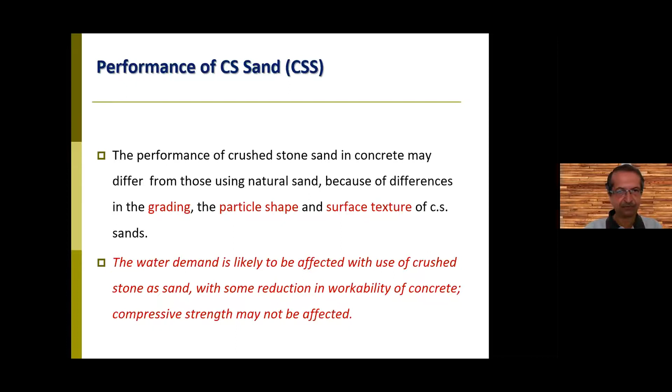If you don't take care of this, your water cement ratio can go for a toss and you may have issues. If it is extra, compressive strength may get affected. But if you take care, definitely you can get very good strength from the crushed stone sand made concrete.

Bond strength was good, and it was also checked for mortar. The workability of mortar is the most important thing here, and it should be such as to allow mortar to spread easily and adhere well to the masonry units, and a flow test is good enough for you.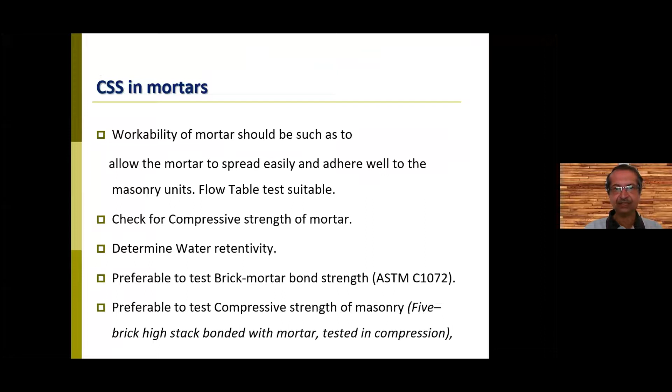So check the compressive strength of mortar before using, determine the water retentivity, and also, if possible, test the brick mortar bond strength. It's preferable to test compressive strength of masonry, that is using a 5 brick high stack bond with mortar, testing compression.

Again, we got some tests done at Indian Institute of Science for mortar. We found that for the same flow, water requirement was more in case of river sand. Compressive strength of mortar for the same flow was more in case of manufactured sand, and water retentivity of mortar was higher in case of manufactured sand.

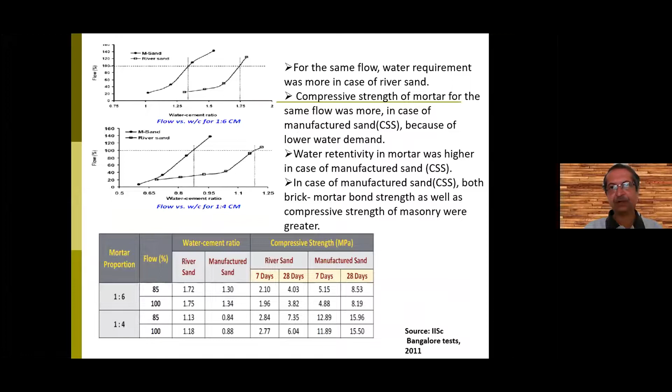In the case of manufactured sand or CSS, both brick mortar bond strength as well as compressive strength of masonry were greater. Quite some detail is available in the tech mailer produced by UltraTech on manufactured sand. You can go through that for more details.

There is also talk of steel slag as aggregate. Steel slag is an industrial byproduct obtained from the steel manufacturing industry, which is a non-metallic ceramic material formed from the reaction of flux like calcium oxide with the inorganic non-metallic components in the steel scrap.

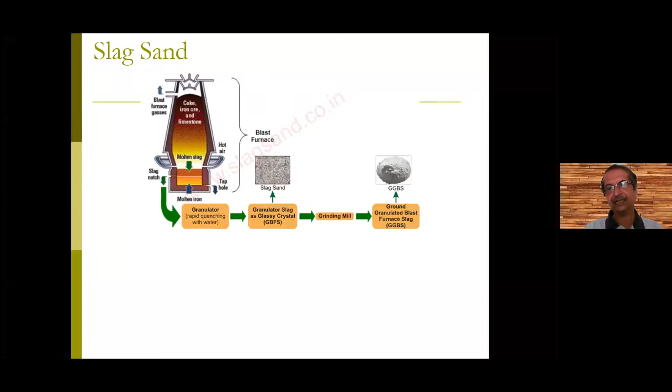The use of steel slag reduces the need for natural rock as construction material, and hence this is being looked at. Slag sand is now being popularized. This is the process of production of slag, and from the slag, after granulation and grinding, you get ground granulated blast furnace slag. The addition of this ground granulated slag is something which should be looked at as a replacement to sand.

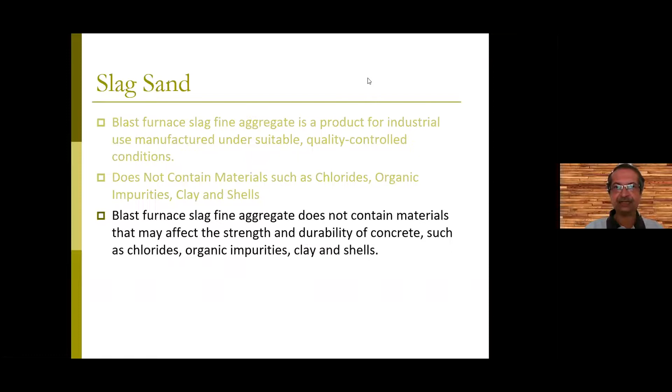This particular material is very suitable because it is controlled in quality in a factory atmosphere. It does not contain materials like chlorides, organic impurities, etc. Blast furnace slag fine aggregate does not contain materials which may affect the strength and durability of concrete. The level of compressive strength similar to that of natural sand is achieved at 7 days and 28 days, and it also does not generate alkali aggregate reactions.

Slag aggregates are available in the form of ferronickel slag, copper slag, molten trash slag, sewage sludge slag - there are so many varieties available, but the most popular ones are iron and steel slag, that is blast furnace slag and steel making slag.

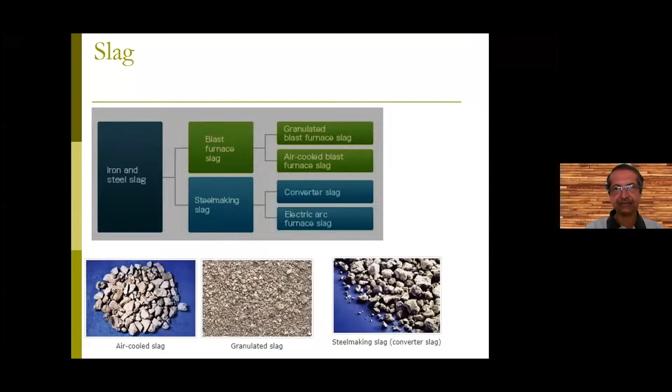Of course, our code has certain restrictions mentioned on the amount of manufactured sand and crushed, and recycled concrete aggregates that can be used.

So whichever aggregate you're planning to use, what you must basically look at before you choose the alternate source is to characterize the material physically and chemically, study the concrete made with that alternative material in fresh state and hardened state, study the effect on long-term properties and durability, and also develop a mix design appropriate to the alternate aggregate you are planning to use.

You may be completely changing from natural aggregates to alternate aggregates, or you may use a certain percentage of the alternate aggregates. Whatever you use, the mix design has to be modified many times, and also there must be a QA/QC procedure laid down.

One thing we must remember is, although there are restrictions mentioned, as I was mentioning in 383, if you look at fine aggregates - iron slag aggregates, only 50% you can use in plain concrete. Steel slag you can use 25% in plain concrete, copper slag 40%, and recycled concrete aggregate you can use 25% in plain concrete.

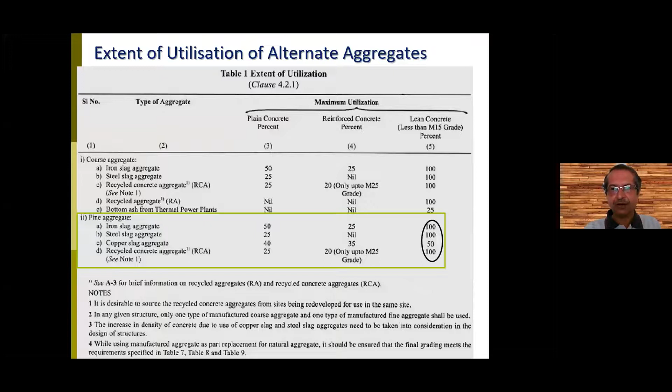Where it is not required, we are unnecessarily using extremely good materials and wasting it. It is like for dumping, for filling of areas where you want to do filling for leveling purposes - you need not use extremely good river sand. You can use all these alternate materials. So you can save a huge amount of virgin materials in the construction industry if you just think as to how it should be replaced.

So in any given structure, the rule according to 383 is that only one type of manufactured coarse aggregate and one type of manufactured fine aggregate can be used. So people have tried to use concrete aggregates, fine aggregates and coarse aggregates made from bottom ash.

Some studies were also done in checking whether pond ash can be used as an alternate for sand. As you all know, pond ash is basically a mixture of coarse fly ash and bottom ash mixed with water and put into a pond outside all these thermal power plants. Several million tons of pond ash are being produced now. But all of these need to be assessed physically, and the physical characterization becomes very important to see whether there are any undue or unnecessary things present in the pond ash.

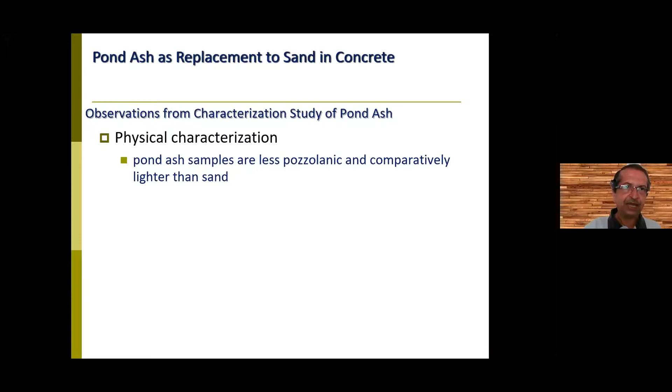Chemical characterization of pond ash indicated that there is no variation between chemical constituents of pond ash and fly ash, because basically it is the same material. So pond ash samples conform to grade zone 4 of IS 383. At that time it was IS 383: 1970, which was being used.

So there is a possibility of some pozzolanic activity, and studies were conducted with pond ash as a part replacement to sand. In fresh state, it indicated that good workable concrete can be obtained. Presence of a large number of spherical particles in pond ash helps in improving workability. Addition of superplasticizers was warranted sometimes, when the workability was slightly less.

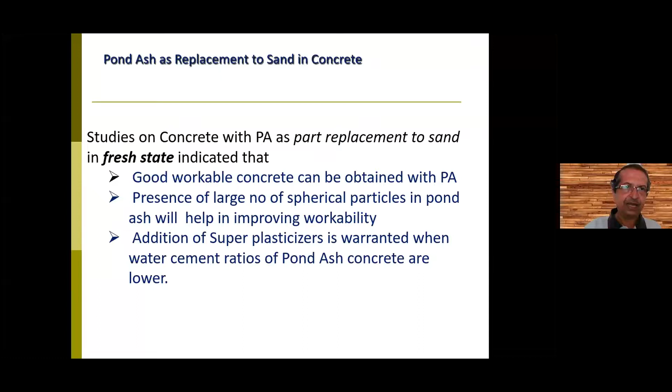Now, in the hardened state, density was found to be slightly less. Increasing strength at later stage was higher for concrete with pond ash compared to normal concrete. Flexural and split tensile strength of densely packed pond ash concrete was found to be equal to that of normal concrete. So pond ash as a sole aggregate was also tried, and up to M25-30 easily we could make concrete with only pond ash as the fine aggregate.

The problem with pond ash we found was that particles between 4.75 and say 1.18 are very, very less. Majority of it is less than 1.18. But by using particle packing theories and modifying the coarse aggregate to fine aggregate ratio, we could achieve and get concrete of M25, 30, 35.

People have tried using marine sand. Of course, there are concerns about corrosion and destruction of concrete structure, but the salt, in fact, remains on the surface of the sand grain only, which can be easily removed by rinsing with fresh water. In Japan, they found that about 0.5 cubic meter of water is required per cubic meter of sand to meet the standards of salt content in sand.

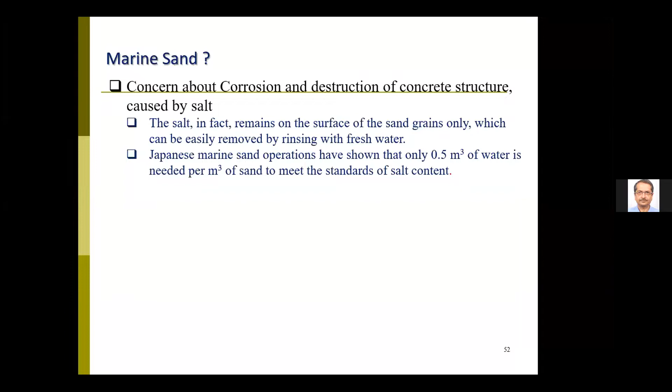Now, how do they wash? You may think a lot of water is wasted in washing. But the water which is just before the backwaters, just about to join the sea, is actually fresh water. So you need to shift the sand about half a kilometer or 1 kilometer inland, wash that sand with the water which is anyway going to join the sea, and use the sand. This is something people are looking at. So the fineness is taken care of because of the dredging below the existing level, but you can also use it partially by mixing with natural river sand. Marine sand has greater roundness compared to river sand, which is a desirable property.